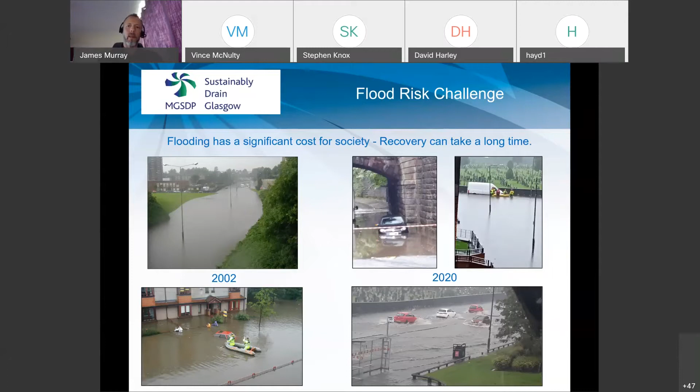If we want to find out about flood risk, well, where do we go? The starting point is the SEPA National Flood Hazard Maps. They're available online. If you haven't looked at these previously, then please do so. This is national strategic mapping by SEPA of hazards from different sources, so river, surface water and coastal, and for different return periods, so high, medium and low, as referred to on the website.

It's really the first place to look for the area where you may have friends and relatives living, for your community, where your business is, but it gives a strategic view. So you'll find when you go onto the website you can't zoom right in, and that's because it is strategic level mapping. It's not to be used to identify flood risk for an individual property, but gives you an indication of flood risk for that locality.

The flood challenge: SEPA's National Flood Risk Assessment 2018, NFRA 2018, identified that across Scotland, for a 0.5% event - and I'll talk about that in a minute - there's currently 284,000 properties and businesses at risk of flooding from one or more sources. In terms of surface water, it's 210,000 properties or businesses and receptors at risk. By 2080, with climate change, the all-sources number is set to go up to 394,000.

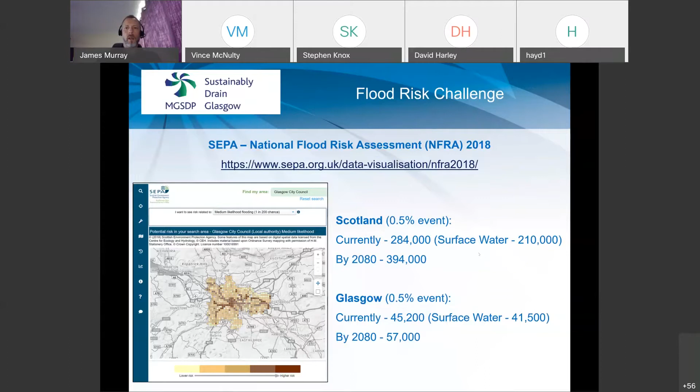Climate change, as everyone probably knows, is going to make all this more challenging. The graphs on the left-hand side - top is winter and the bottom is summer - show two different climate change scenarios, but generally winter's getting warmer and wetter, with those lines showing the precipitation change in percentage. And generally, with summers being warmer but possibly drier, we will be experiencing more intense rainfall events.

On the right-hand side, you can see Scotland's annual rainfall is increasing, and a contributing factor to that is we're getting more heavy rainfall events. So whilst individual summer days might be getting a bit drier, we're going to have rainfall events that just add to that total rainfall. Indeed, for the most recent decades, UK summers have been on average 13% wetter than 1961 to 1990, and UK winters have been 12% wetter, so a lot more water coming our way already and in the future.

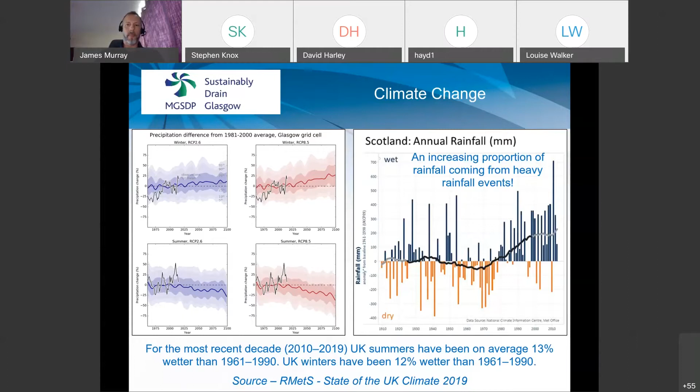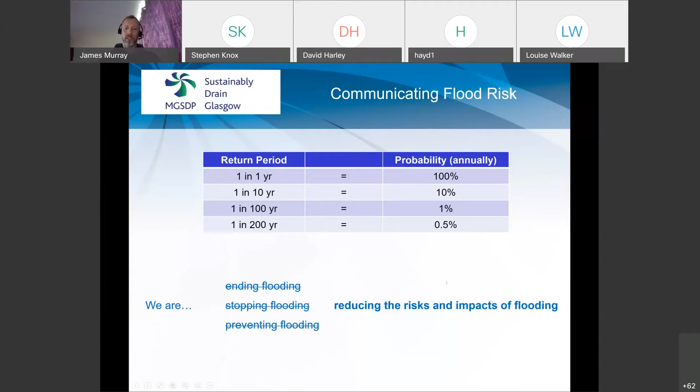And if you deliver a project which has been designed to address a certain level of probability of flooding, flooding will still happen, so telling people you're going to do a project that ends flooding, stops flooding, prevents flooding is misleading. You need to talk about the risk and impacts of flooding so that people appreciate there is still that residual risk there. Cumulative probability. So again, trying to help understand how the probability can affect people over time.

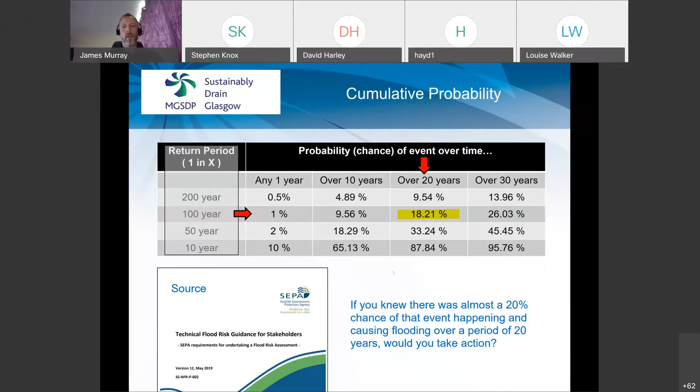James, I'm just wondering if you could maybe switch off your video, because there's quite a few people getting your voiceover breaking up. Thanks. Okay, hopefully this helps with the audio. Thanks for that, David.

The other challenges that we've got, so we've talked about climate change, the other challenges that we've got in terms of flood risk: loss of open historic watercourses as urban areas have developed. So these watercourses have either been put into culvert and below ground, or way back in time they were just so polluted that they probably actually became part of the sewer network. So that's meant we've got a loss of conveying capacity in our urban areas.

Below ground drainage systems have finite capacity. You know, a pipe, a tank, it can only store or carry so much water, and climate change is bringing events that are beyond the capacity of assets that were sometimes constructed many, many years ago. Most of our urban areas are served by combined sewers, so that's the foul and the surface water going into the same pipe. And we need to get that existing surface water out to reduce flood risk and provide space for new development foul flow to go into the sewer system.

Urban creep, so that's new hard surfaces, property extensions, paving over front gardens, etc., causing a loss of permeable area, which reduces the potential for ground to infiltrate and attenuate rainfall, and creates more and faster runoff that then gets into our drainage system and has to be managed.

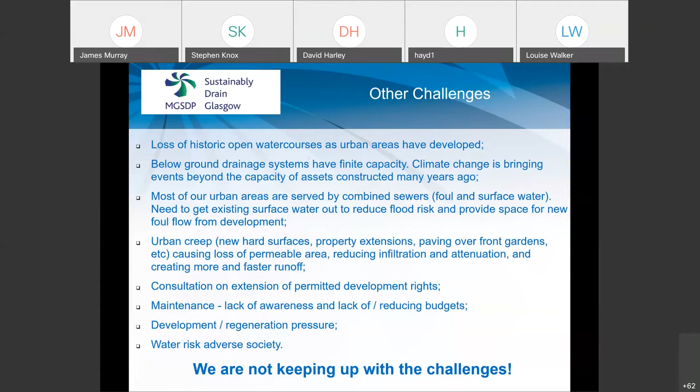So, responding to the challenges, I don't think people will be surprised for me to say that there is no silver bullet. There's no one thing that we can do that's going to solve everything. And flood risk resilience is most effective when delivered in a layered, adaptive approach.

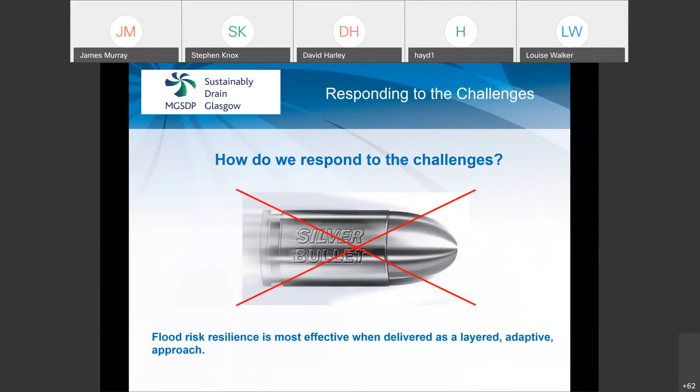And the time for action, well, we need to be proactive. The best time to take action to reduce flood risk was during the last spell of dry weather. The second best time to take action is today. Both are preferable to taking action after a flooding event, when you have the cost of recovery, the cost of responding to deal with, and then the cost of delivering something to reduce risk for the next event.

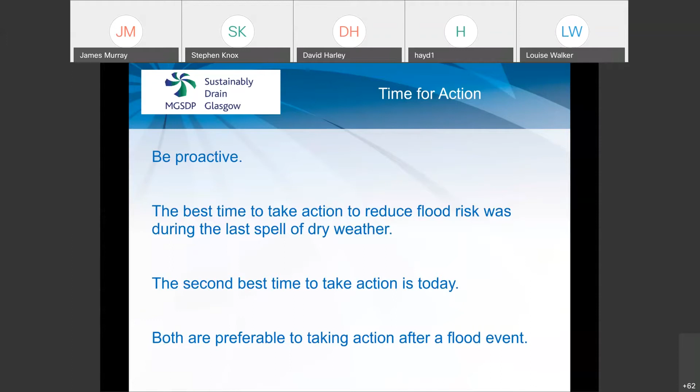A little bit about responsibilities. So, in Scotland, it's the owner's responsibility to protect a property from flooding. That's the starting point in Scotland. Landowners also have other responsibilities to undertake maintenance and prevent deterioration of watercourses, including culverted watercourses that in some cases they may not even know about. And they have a responsibility to not increase the flood risk to others.

Scottish Water is responsible for the drainage of surface water from roofs and any paved surface within the property boundary or the curtilage. Local authorities have several roles relating to flooding, with powers and responsibilities under the Flood Risk Management Act, as the Roads Authority and as the Planning Authority. And SEPA is Scotland's National Flood Forecasting, Flood Warning and Strategic Flood Risk Management Authority.

Our risks are a factor of our actions and the actions of others. So we must all take action to reduce the risk and impact of flooding for ourselves and others. We all have a responsibility for ourselves and others.

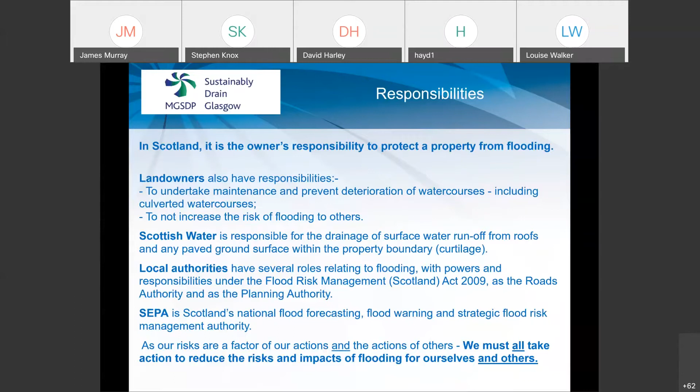So in terms of those layers for flood risk resilience, the first layer really is to get informed and plan. Earlier, we talked about flood maps, awareness of flood risk for your area: where friends and family live, where your commute goes, where your business is. And if you are at flood risk, or if you want to find out more about what you can do, then we've got the Floodline website, where you can develop a plan for action to respond to flooding at your home or your business or your travel.

You can also, via the Floodline website, sign up for flood alerts. So you get notification by your mobile phone when a flood alert has been issued for your area, and that just allows you to get a heads up on possible risk incoming.

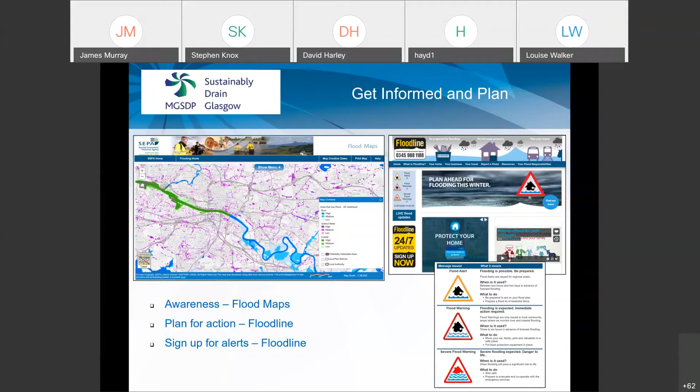Next layer we look at is property flood resilience. Scottish Government published towards the end of last year Living with Flooding. That's an action plan for delivering property flood resilience in Scotland. There's 3 objectives in that, and the first is to build a better evidence base. So research is ongoing and case studies are being developed. So that research is looking at uptake of property flood resilience.

What are the barriers to uptake of property flood resilience, and trying to understand why someone who perhaps has been flooded in the past hasn't then taken any steps to increase their resilience to any future events. So that's going to be very useful research when that's completed.

Influence policy and provide clear guidance. So that's looking at what we need to influence in terms of raising awareness and changing how we do things. So that's looking at possible changes to the building regulations, possible changes to the home reports. In the home report, you provide a lot of information. You have to provide information on the energy efficiency of the building. There is an argument that there should be something in there about the flood risk of the property and any resilience measures that are there.

And also training. So guidance around training can be informed by things like CIRIA's recent code of practice for property flood resilience, but also looking at training for people like chartered surveyors if they need to do an assessment of a property's flood risk and possible resilience measures.

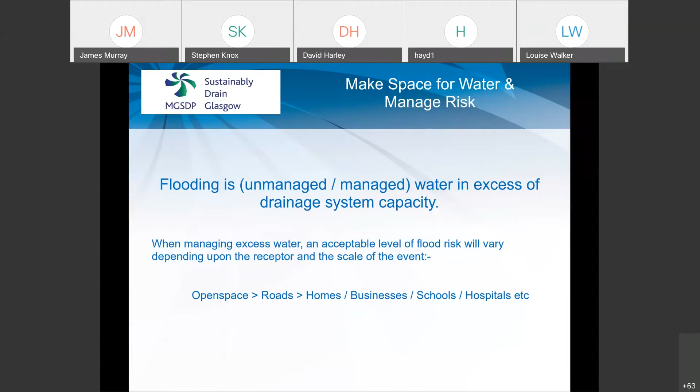The interventions layer, grey versus blue-green. It's not so much versus. We're always going to have traditional grey approaches, and so that's focusing more on capacity, pipes, tanks, pumping, but that's carbon heavy and not sustainable long term. So we need to transition to more blue-green, nature-based, SuDS, sponge concept solutions. All these terms are broadly interchangeable. So I'll be talking a lot about SuDS and blue-green infrastructure, but it's nature-based solutions.

It's the sponge concept. And that's trying to manage water on the surface close to where it falls before it gets into our current drainage system, and manage it via ponds, basins, street trees, rain gardens, swales, green roofs, natural flood management measures, etc. Because they're a more sustainable, adaptable, long-term delivery of interventions that give multiple benefits.

So we're always going to need some of the grey, but we just need to get that balance tilted more towards the blue-green if we want to be resilient and sustainable in terms of our approach to flood risk long-term. If we want healthy people, we need healthy places, and the blue-green can give us that.

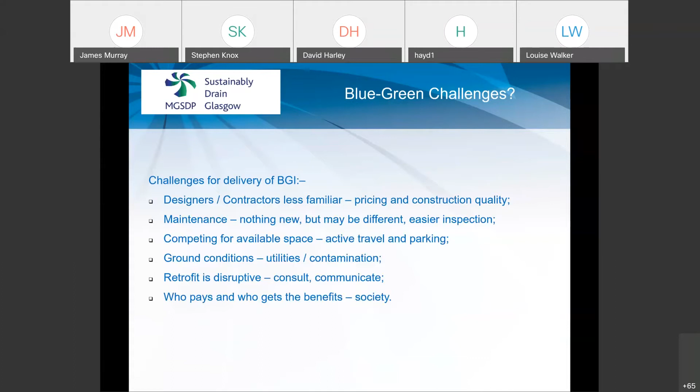How to deliver blue-green infrastructure? We need to plan ahead if we want a sustainable, water-resilient city region in a changing climate. So that's a multifunctional blue-green infrastructure first approach. We need to invest in enabling infrastructure to create the links for blue-green infrastructure to join up and create a blue-green network.

We need to take opportunities as they arise to deliver multiple benefits. If you're doing urban realm improvements, active travel, traffic calming, maintenance, redevelopment - look at how you can deliver extra benefit by managing the water through those as well. We need to collaborate and share knowledge of the opportunities and the learning, and share the costs.

There's a number of organisations and groups involved in this area that can collaborate to deliver some of these benefits. We need to assess the risks - is it appropriate? Is it the right tree in the right place? That sort of level. We need to consult and engage.

What are people's concerns about delivering blue-green infrastructure? And we need to plan and fund both the construction and the maintenance.

Sewers for Scotland, a couple of years ago, increased the range of SUDs that Scottish Water will consider for vesting. And we also have the Section 7 Memorandum of Understanding these days, which is a mechanism for sharing responsibility for maintaining SUDs between local authorities and Scottish Water.

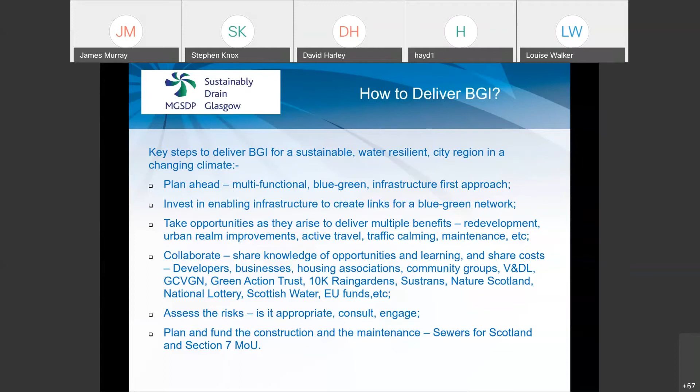So I'm breaking this next section up into three parts, and I will move quickly because I'm conscious I'm likely to overrun. For new development, SUDs are mandatory for more than one property. It's easy to do SUDs at the minimum level; it's not so easy to do SUDs well.

We've got some good examples, we've got lots of bad examples. It is improving. But certainly for new development, it's easiest if you do it as an infrastructure first, blue-green placemaking approach with early engagement. Water flows downhill, so unless you want to be carbon heavy in terms of how you manage and treat and pump that, recognise that water flows downhill.

So allow for that in your design of your development and where you're going to manage the water. Engage with Scottish Water and the Planning Authority, who will say to you that you need to consider this, perhaps take it in this direction in terms of your surface water discharge, and that may add costs to your development. So plan that up front so you know if you're going to have to do these things. We need to use water as an asset, managing it on the surface with blue-green infrastructure.

As mentioned already, Sewers for Scotland and the Section 7 MOU are there to facilitate the delivery of SUDS and ensure that they're planned and maintained long term. Scottish Water's Surface Water Policy and their hierarchy of discharge options is the starting point.

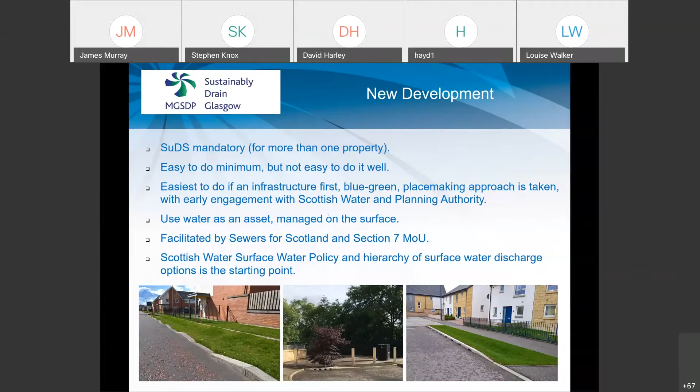Looking at that in a bit more detail, Scottish Water's Surface Water Policy states no new surface water into the combined sewer network. They work with developers and regulatory bodies on removing surface water from the existing combined sewer network and support economic growth.

Their hierarchy of options for Scottish Water is: rainwater stored and reused on site, ideally, through rainwater harvesting—we don't do much of that at all, but we should be. Then surface water drained through the soil, infiltrating into the ground.

In the west of Scotland, that's a bit challenging due to our glacial till soils generally, but it can be done in some locations. Surface water drain to watercourse or existing or proposed SUDS—that's usually where we're ending up if we can't do one or two.

Option 4 is surface water drain to a surface water sewer, and down at the bottom, the least preferred option is surface water drain to a combined sewer. To get to that point, you need to, as a developer, justify why you can't do 1, 2, 3, or 4. And saying it's going to cost too much is not justification.

If you get to option 5, Scottish Water is going to set a maximum discharge rate, and consideration will also be given to requiring removal of an equivalent amount of surface water from another part of the sewer catchment, so that there's net zero detriment to the sewer.

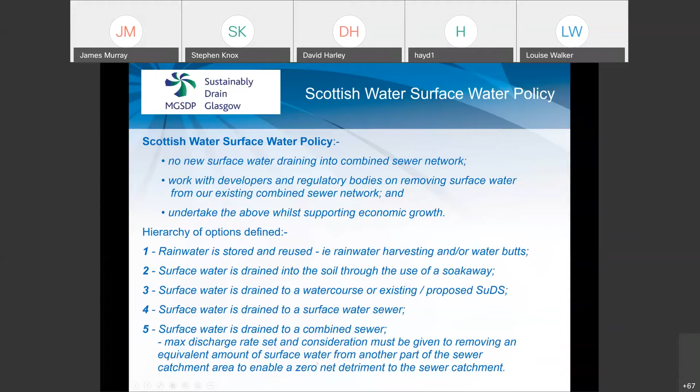And indeed, roads also require SUDS. So good examples out at the Cathkin Relief Road, delivered by South Lanarkshire Council, with a number of SUDS interventions along that new road.

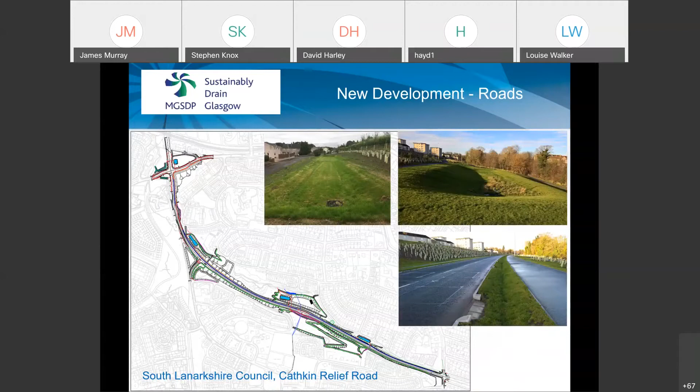The next level is redevelopment retrofit, which is harder to do than pure new. Again, SUDS is mandatory, and again easiest to do if it's an infrastructure approach where you think about it, consider placemaking, and engage early with Scottish Water and the local authorities about where that surface water is going to go.

Again, informed by Sewers for Scotland, because when you're redeveloping you may not have quite the blank sheet to start with. Sewers for Scotland does have a waiver process where you can discuss with Scottish Water how you may try to get as close as possible to the surface water vestable options for SUDS that are in Sewers for Scotland.

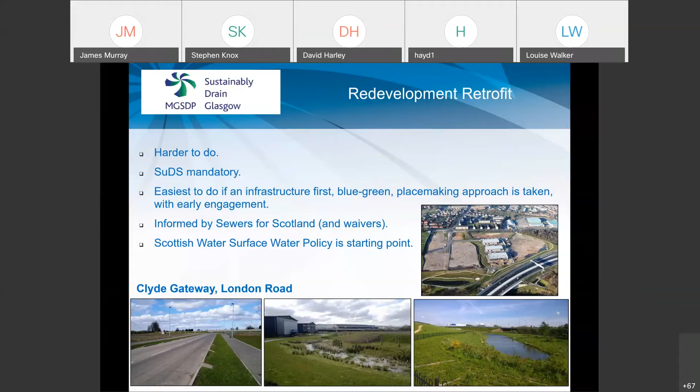And again, Scottish Water's surface water policy is the starting point. A couple of images here of Clyde Gateway's London Road development, where a number of different interventions were put in place as part of a chain of SUDS down through the site.

And again, more examples here from Clyde Gateway, Scotland's first green regeneration innovation district, where they're very much taking the placemaking approach for multiple benefits, putting in SUDS ahead of development to enable that development to come on board and connect into strategic SUDS already put in place. So it's very much facilitating redevelopment and regeneration in a best practice way.

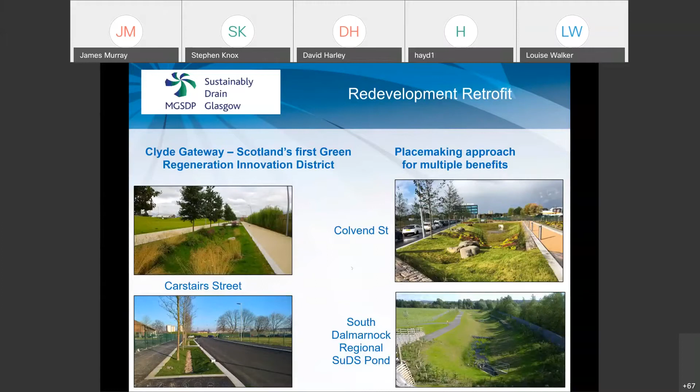The hardest one to do is pure retrofit. It's disruptive, with multiple stakeholders to engage if you're doing it in urban areas. Generally low tech, but we also have things like Glasgow's Smart Canal, which has put smart sensors and intelligence into an existing asset to use it as a very large SUDS pond in effect, providing capacity in terms of flood risk management for development and regeneration in the north of Glasgow.

In pure retrofit, we're looking for betterment, disconnection ideally, or at least attenuation and delivery of multiple benefits. It can be large or small—examples on screen include individual property level rain gardens, downpipe planters, and water butts. They can all make a positive contribution to attenuating surface water runoff, and projects like the 10,000 Rain Gardens project are good examples of how to do this.

In pure retrofit, we do need to act swiftly on opportunities as they arise. That's where we're doing other things, and we can realise multiple benefits if we add in a bit of surface water management whilst we're doing that as part of the redevelopment, urban realm improvements, or active travel.

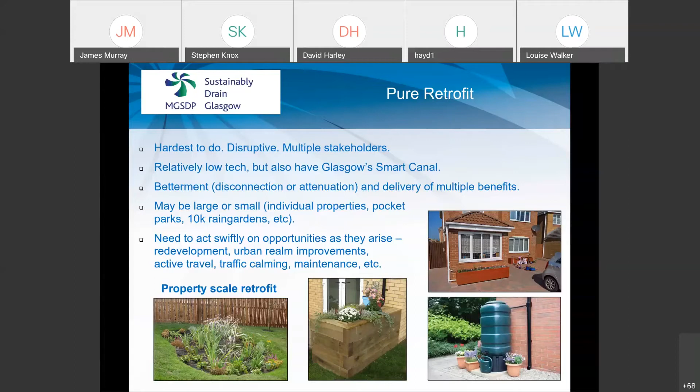I'm not going to have time to go through all of these examples, so I'm going to quickly skip through a few of them.

Cardowan Surface Water Management Plan, Blairtummock and Easterhouse: low quality open space with development sites lying vacant, the existing watercourse shown as the dashed blue line, and some local red blaes pitches.

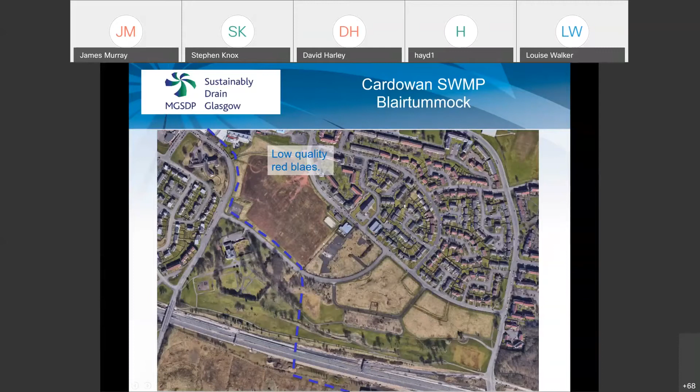Glasgow City Council, NatureScot and Seven Lochs have improved this green space, opened up the watercourse, and provided a SUDS pond and basin for future hatched development areas. The open watercourse provides flood capacity to manage surface water above ground, with huge improvements to the green space and new active travel pathways and corridors for communities to access it.

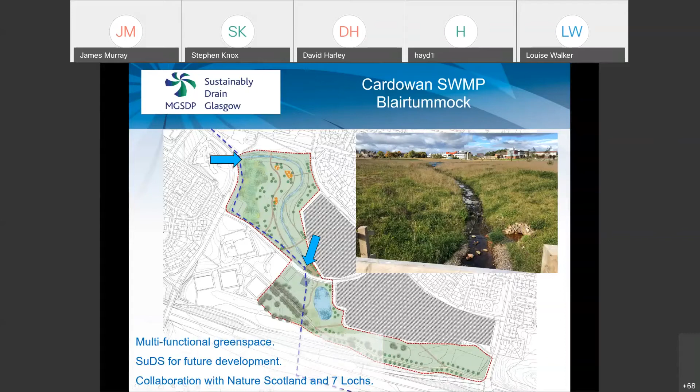Other sites delivered as part of this project retrofit SUDS into existing open green space at Croftcroighn Road, Croftcroighn Park, and Cranhill Park. We also have highway rain gardens in the area and new connections put in for development to come forward and connect into these SUDS.

So very much taking a strategic approach, both reducing the surface water pressure on the existing combined sewer, but also allowing for development to come forward in a sustainable way.

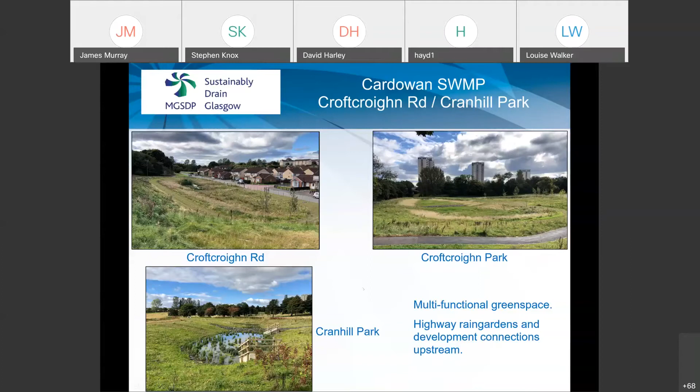I'm going to skip through Hillington and Moss Heights because you can find out more information about that on NatureScot's Green Infrastructure Project website.

South East Glasgow Surface Water Management Plan: Croftfoot Primary School has large hard standing areas and roof areas connecting into the combined sewer. What we've done here is picked up those surface water runoff points.

We're managing that through a games area with storage below. We've also got an amphitheatre which acts as an exceedance management point, so if it fills up the below-ground storage, it will also fill up this above-ground storage prior to discharging via a new connection into the surface water culvert, taking all of that out of the combined sewer.

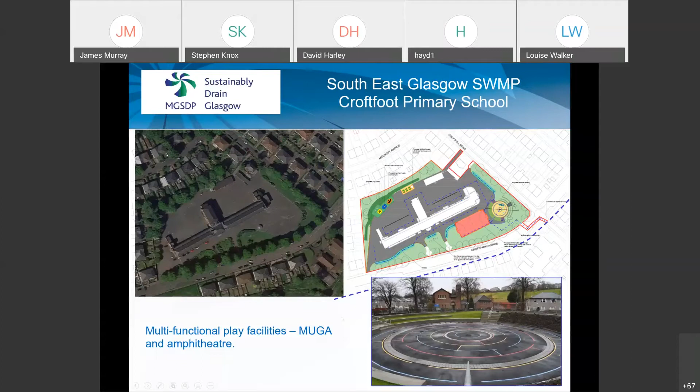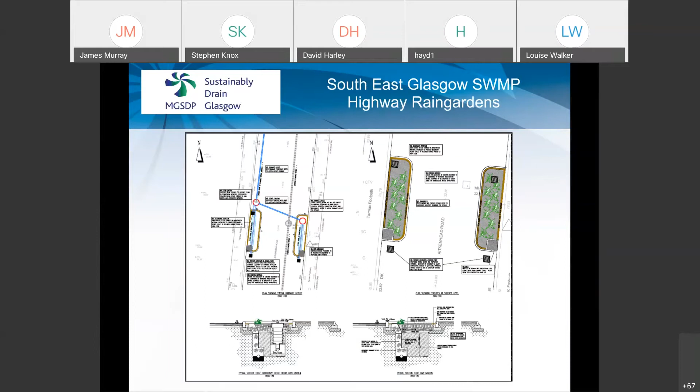With South East Glasgow, we're also delivering highway rain gardens. These are vegetated areas that take surface water off the road, manage it, slow it down, before it goes back in, or in this case, into the watercourse.

In many locations, putting in highway rain gardens will slow the flow down. It may still go back into the combined sewer, but at least you're getting the benefits of attenuation and reducing the peak of that surface water runoff.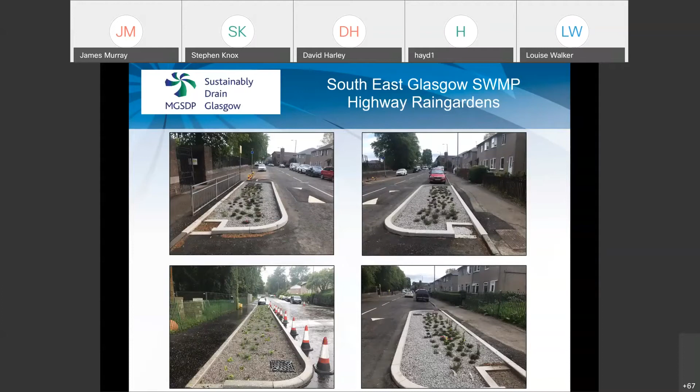Other interventions at South East Glasgow include multifunctional green space improvements, such as deculverting and new SUDS basins, providing additional benefits from what was existing open green space.

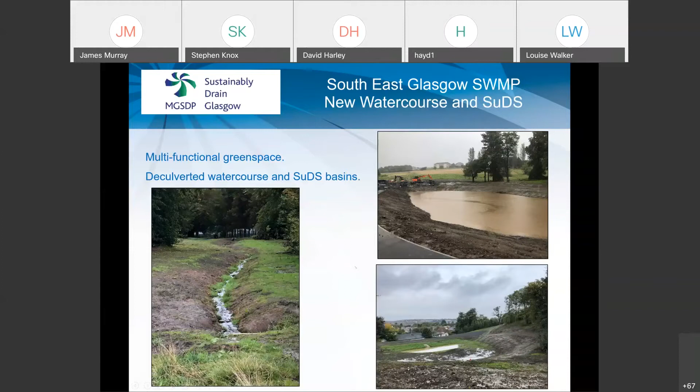We've got a whole number of other surface water management plans. The top two there are on site at the moment, with other surface water management plans being facilitated by City Deal funding coming along in the programme, and other non-City Deal surface water management plans being developed at the moment.

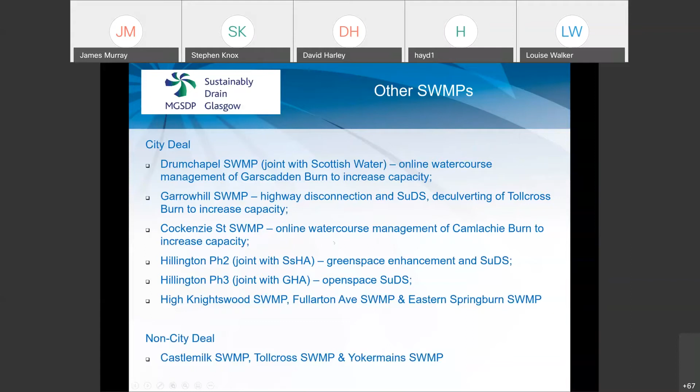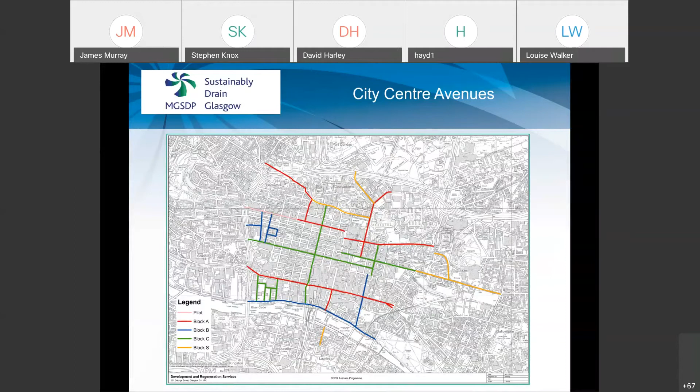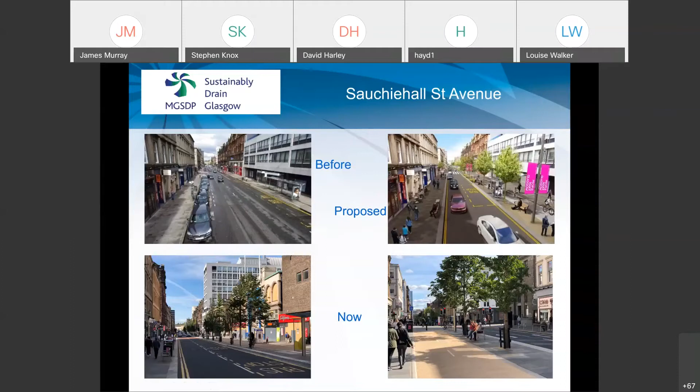City Centre Avenues project being delivered by Glasgow City Council: a network of streets through Glasgow City Centre where urban realm improvements are planned. The first one delivered was at Sauchiehall Street, with the bottom two images showing active travel, reduction in car space, and surface water management provided through street trees, with the aspiration that the next phases of the avenues project will build on this and bring much more blue-green infrastructure.

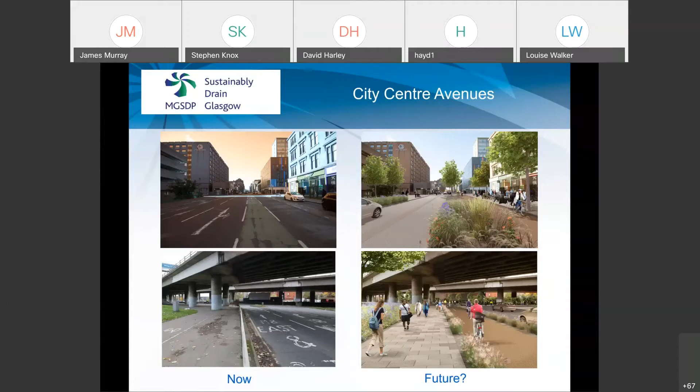That's being done as subsequent avenues are delivered through the programme, including Cambridge Street and the underline, as we call it, on Argyle Street, through the City Centre Avenues project. We also have the North Glasgow SDF, which just went out for consultation yesterday, showing the aspiration we're reaching for in terms of bringing blue-green infrastructure into these local town centres within North Glasgow to improve resilience and make them nicer places to be.

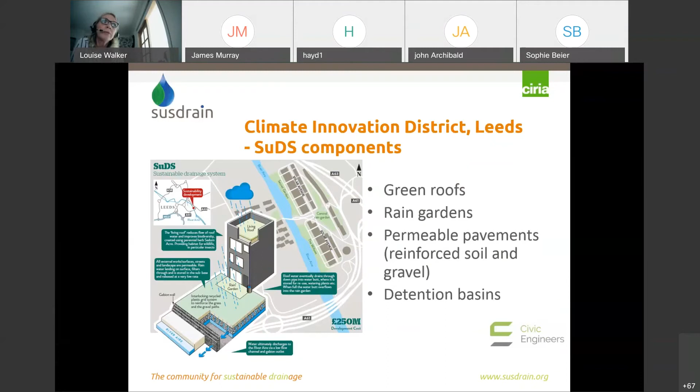SUDS were planned in from the start. There were lots of challenges that were overcome, helped by the lack of roads. The final comment was: developers say there is no room for SUDS, and this demonstrates that there is.

So the second new build scheme is Albion Close in Lincoln. The competition considered SUDS completed since 2016. While this scheme was designed in 2012, it wasn't formally adopted by Lincolnshire County Council and Anglian Water until 2017, so it was allowed into the competition.

It's considered by Lincolnshire County Council to be a prime example of early good practice SUDS. It's well thought out and incorporates the principles of a SUDS management train, and demonstrates where over subsequent years important lessons have been learned that have influenced current good practice in Lincolnshire. The overall surface water strategy ensured that non-statutory SUDS standards were met, but also went beyond these to provide increased local amenity, natural habitat and biodiversity.

It includes rainwater harvesting, permeable paving, bioretention basins which are adopted by Anglian Water, grass filter strips adopted by the Highway Authority, grass swales for conveyance, and wire basket check dams. The detached dwellings were built to level 5 of the Code for Sustainable Homes.

So with regard to managing flood risk to and from the site, flooding on the drainage system doesn't occur on any part of the site for a 1 in 30 year rainfall event, this is how the entrant describes it, and it doesn't occur during a 1 in 100 year rainfall event in any part of a building or for neighbouring sites. The climate change allowance of plus 30% was included, and flow routes were taken into account by the design in case of exceedance, which directed the flow to the existing public highway.

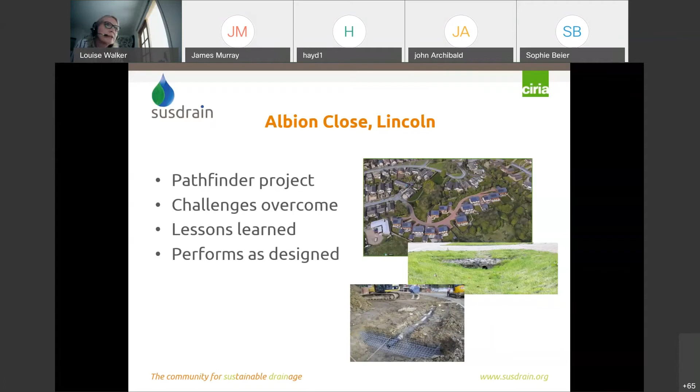It was a very difficult site and ask. It was a sloping site, but the mass house builder and local authority worked together well. A final comment was they need to stop close mowing it to achieve more insect life.

The third new build is IKEA in Greenwich. It has 4,000 metres squared of green and blue roof and roof garden, plus 7 green roof bike shelters. There's a rainwater harvesting system, ground level wildlife gardens and habitat creation.

IKEA at Greenwich has achieved an outstanding BREEAM UK New Construction Certificate, an accolade held by just 320 buildings around the world. It's the first in the UK and only the second retail unit in the world to receive the sustainability rating with over 90%.

It provides water storage, minimal runoff, rainwater harvesting, habitat, wellbeing and recreation, rooftop farming, building insulation, carbon reduction and sequestration, and an opportunity for tourism.

The green roofs, blue roof and roof garden consist of biodiverse sedum covered areas, wildflower meadows, raised urban farming beds for community use, and all surround a rooftop pavilion which is accessible all year round during store opening hours. It's London's largest accessible rooftop.

There's various events it was used for. I'm not sure under current circumstances whether that's the case.

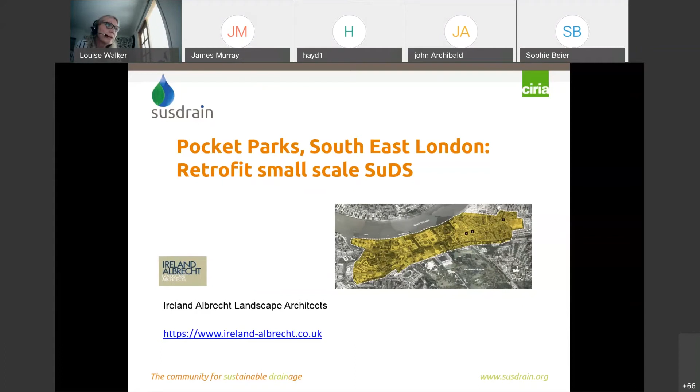And this type of approach is applicable everywhere. All 3 look very good and are integrated with the highway. And you can see the location there alongside the Thames. So Pelton Road, this junction was closed to traffic since the 1980s, and during that time a large London plane tree grew. This was the gateway to historic Greenwich and was quite underwhelming.

So the new layout centres around the formation of 3 linked drainage swales. One swale takes surface water from the road. There's a shallow layer of topsoil with a stone filtration bed beneath to break down pollutants. Below that, the swales are linked by a perforated pipe drainage system to help reduce stress on the local drainage system and replenish the surrounding groundwater. These provide water for both the existing plane tree and 8 newly planted trees.

So the design was for a clutter-free streetscape with improvements for pedestrians and cyclists, and the inclusion of informal play boulders and hopscotch patterns that are part of the Play on the Way theme that linked 2 local primary schools and a nursery.

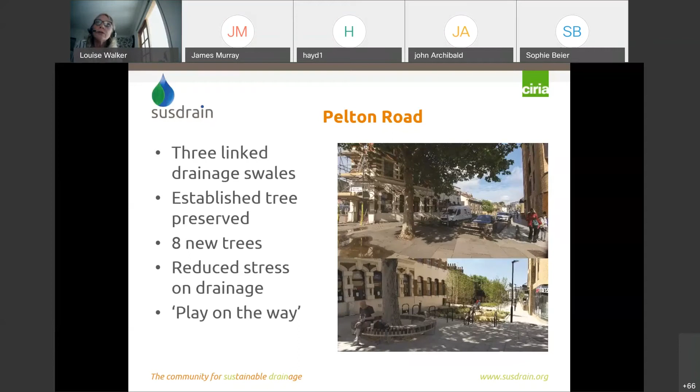Hoskins Street had 2 major constraints, an air quality monitoring station and a medium pressure gas main. So greening proposals couldn't interfere with these, but to maximise the benefit, the proposals extended further to spread out the greening. So similarly with the other pocket parks, the SUDS remove as much surface water runoff as possible from the highway using swales. The system is designed to retain existing assets such as road gullies that will only come into use during extreme weather events.

The design approach also ensures that utility companies and the Highway Authority can maintain their assets without having to source expensive materials or undertake specialist construction methods.

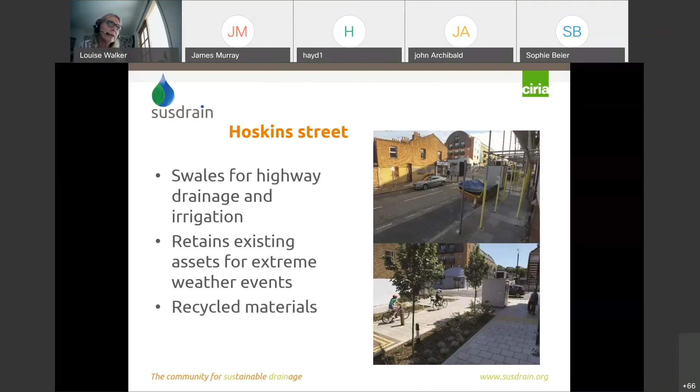Mell Street's the largest of the 3 pocket parks, situated between 2 council housing blocks. It includes an improved streetscape for pedestrians and cyclists, a community garden space where residents and local people can grow food and be involved in the maintenance of the garden. And there's also a green roof tool store with a community notice board and a water supply.

There was supposed to be a community planting day, which had to be cancelled, but people are growing plants at home, mainly for food production that they can plant out when restrictions ease. A second phase has been designed, which will include a shared pedestrian street with more planting and swales and place for a market stall.

So my final example is Clandeboye Primary School, rainwater garden in County Down, Northern Ireland. So the rainwater garden is located in the grounds of the primary school with an existing space interspersed with mature trees and close to a dense residential area near the town centre. The SUDS features were proposed by Northern Ireland Water to resolve 2 surface water management issues. 1, an increase in stormwater volume, and an existing...

Hi Louise, sorry, your audio has gone very quiet. Sorry, I think I just moved my... That's better. That's better. Yep, thank you.

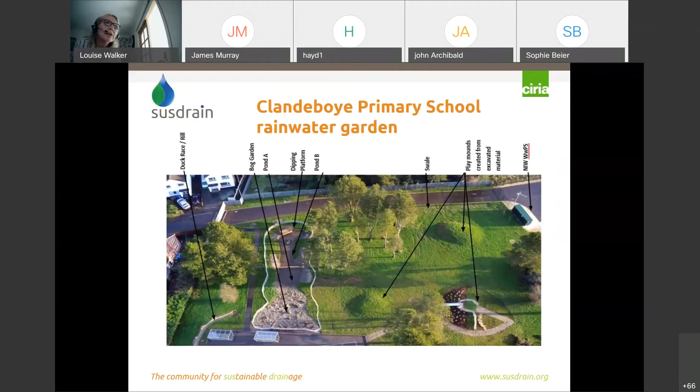The judge's comments on this entry were that there are lots of elements to this scheme. A lot of space was available and it just seemed quite overcomplicated. There's a swale to collect water on the road, which results in water quality and quantity management. A geocellular tank was included, and it was not clear why, unless it was to keep the rill working for the children to play with. It does facilitate play, and the grass mounds work well for attenuation. It's an imaginative and illustrative case study.

The key challenges, as you might imagine, were predominantly linked to health and safety concerns. The Education Authority raised concerns about the risk of pupils attending the school and the potential of legal action taken against the board should accidents occur. Due to the location of the rain garden, community engagement meetings were held to discuss the projects and planned works and to address possible concerns.

A visual design proposal of the project was created and shared with the community, along with a detailed risk assessment report carried out by RoSPA. The inclusion of the RoSPA risk assessment was critical at allaying valid concerns regarding the inclusion of open water within a school environment, with the third-party independence and objectivity of it adding comfort for decision makers.

Key to the success of the project was the early inclusion, buy-in and subsequent advocacy of the school's Board of Governors, and in particular the headmistress, whose energy, vision and positive approach to perceived obstacles secured the success of the project.

So reflections on the SUDS Awards this year. The judges noted the hugely improved quality and innovation of SUDS schemes over the 2 years since the last awards, and this prompted them to consider additional categories, which included small community projects, of which we received a lot more entries, and to consider the innovative approach to overcoming challenges. So people that are not just installing schemes they've seen before, actually thinking about the challenges.

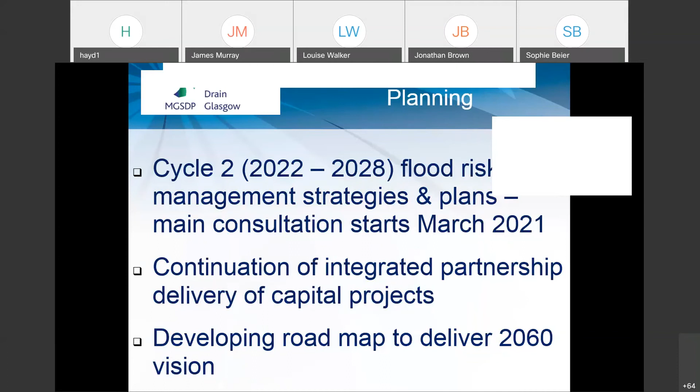In terms of knowledge, it is critical that we make evidence-based decisions. SEPA, South Lanarkshire Council and the City Council are currently investing in new hydraulic models for the River Clyde, and a new model for the tidal Clyde, where flood risk is determined by spring high tides and storm surges, will be used to inform the development of an adaptive strategy.

The Smart Canal, which is unlocking major regeneration sites in the north of Glasgow, provides the opportunity for knowledge to be gained on the performance of housing-based SUDS through the real-time monitoring of both the volume and the water quality that is discharging from these development sites into the canal. And what this will help inform is the level of attenuation that SUDS achieves, and we can then use that for further calibration of the hydraulic models that inform the design.

Within Glasgow, we have only a limited number of rain gauges, and there is a question mark as to whether or not we fully understand the frequency of these intense storms that cause flooding, particularly during the summer. And what we are working on alongside SEPA is to deploy rain gauges to schools to improve the level of knowledge we have with regard to storm data within the city.

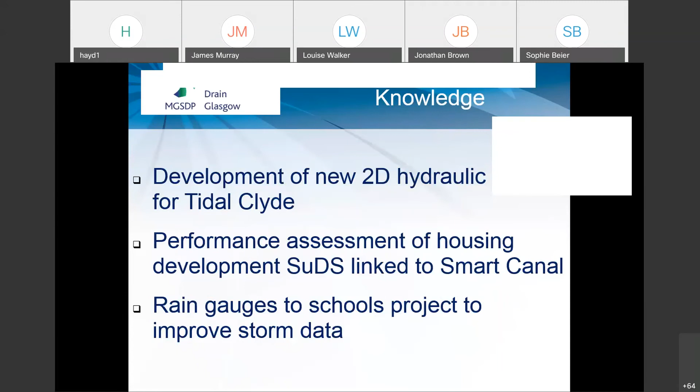In terms of investment, we need to recognise the significant investment that has been made to date. Scottish Water committed 100 million for the Shieldhall Tunnel. The City Council, with support from the Scottish Government, committed 50 million to the White Cart Water Flood Prevention Scheme. City Deal is investing 45 million in increasing drainage capacity. 15 million has been committed to the Smart Canal, and we still have 45,000 properties at risk of flooding.

Investment is required to stand still and avoid the number of vulnerable properties increasing due to climate change and urban creep. Scottish Water's next investment programme, SR21, is set to increase the focus on blue and green infrastructure and will form part of a longer-term development plan that Scottish Water are bringing forward.

I think part of the success of the MGSDP is bringing partners together to share the burden of this investment, and we welcome the Clyde Gateway project that they're leading at Malls Mire Park in the south side of the city. And we really welcome the support from other public sector agencies, such as SEPA through the Water Environment Fund and SNH through the Green Infrastructure Fund.

James touched on a couple of the SNH funded projects in his presentation, but the Malls Mire Park project is a further example of that, and we hope to be on site at Queensland Gardens on the south side of the city, which is another SNH funded project next year.

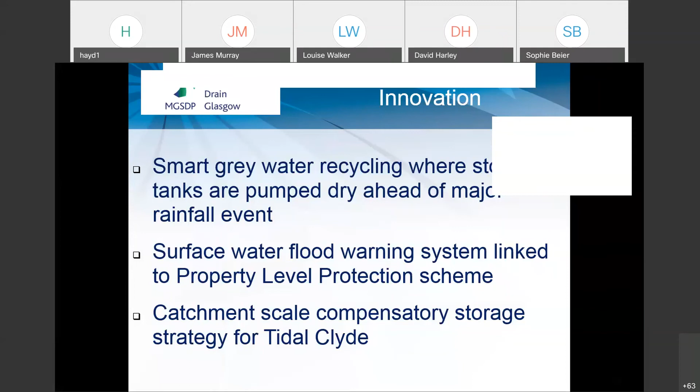I've been just casting my eye over the chat. Not many in terms of actual questions in there, but certainly a good bit of discussion around vacant and derelict land and the potential that has to provide a function for blue-green infrastructure and surface water management.

And also good to note, again, the 10,000 rain gardens project, which has been submitted as a potential NPF4 project, but also submitting a bid for EU LIFE funding. So that's no doubt going to be keeping Emily busy until that submission is sent off, but that's very positive.

And certainly the engagement that the 10,000 rain gardens project and Emily has had on some of the surface water management projects that GCC have been delivering has been very useful and very beneficial and very much welcomed.

There's also a little bit of chat in there around, I'm just scrolling back up to that, yeah, about when I said the Scottish Water surface water priority of, or hierarchy of options in terms of surface water management. So just to expand a little bit on what I said about infiltration, the predominantly glacial till heavy clay soils in the west of Scotland don't lend themselves to effective infiltration, and certainly not infiltration at a rate that would allow a site to rely entirely on infiltration.